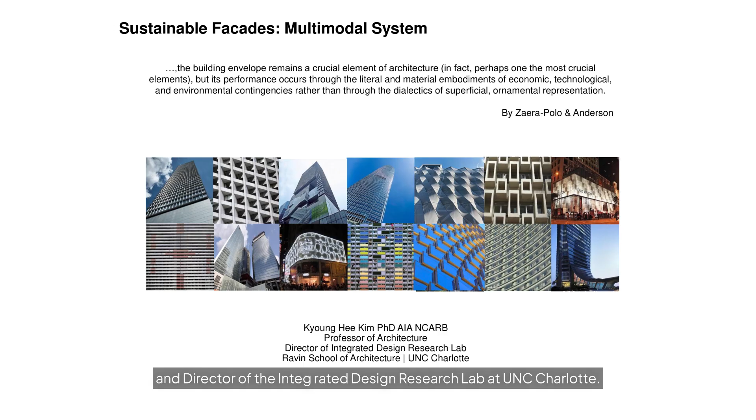Hello, I am Dr. Kyoung-Hee Kim, a professor of architecture and director of the Integrated Design Research Lab at UNC Charlotte. In this lecture, I will provide an overview of the importance and design principles of sustainable building enclosures.

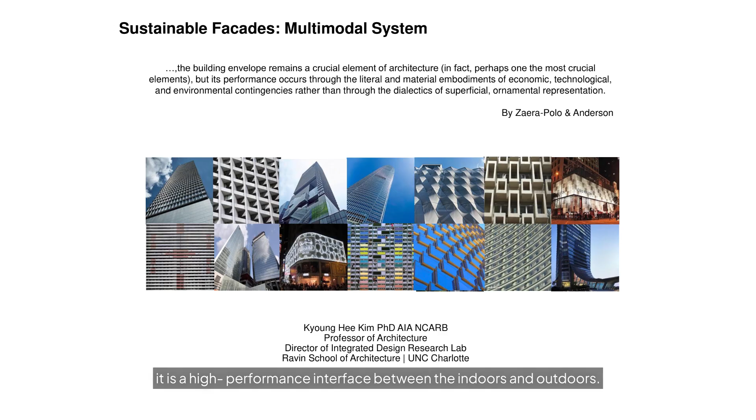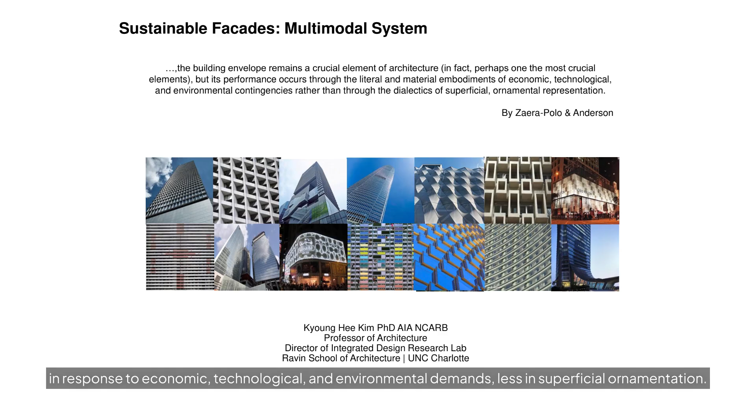Sustainable building facades serve multiple functions and operate across different scales and applications. The building facade is not just an aesthetical surface, it is a high-performance interface between the indoors and outdoors. As architects Zaera-Polo and Anderson argue, the building facade's significance lies in its material performance in response to economic, technological, and environmental demands, less in superficial ornamentation.

As I mentioned earlier, building enclosures operate at multiple scales from people to cities to the planet. They can function as economic, environmental, and social infrastructure, and they are more than a mere building surface or an aesthetic element. They interact with the environment to the advantage of people inside the building, the surrounding community, and the planet.

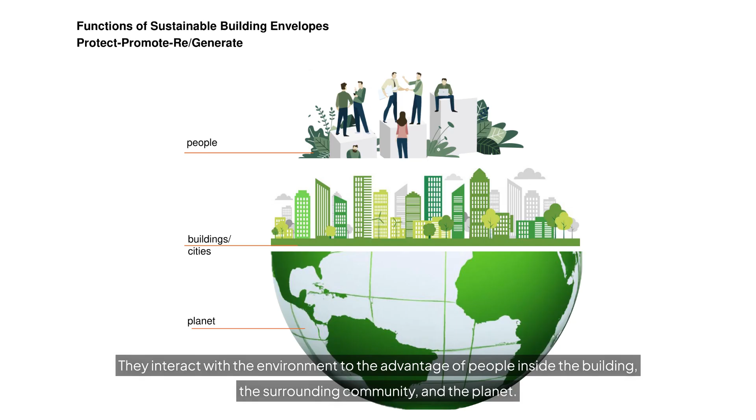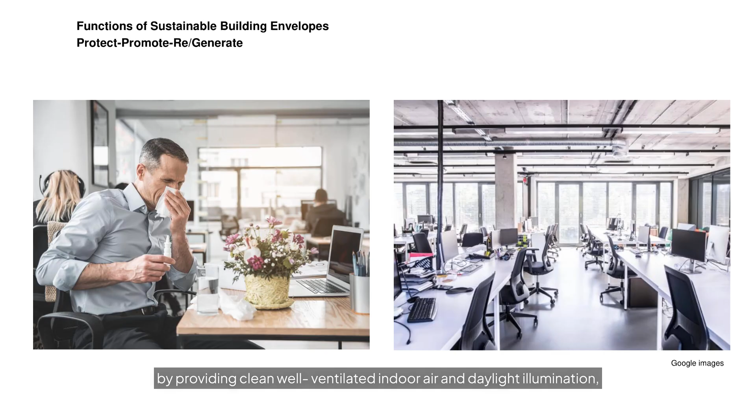On a personal level, the building enclosure is a filter against excessive outdoor environments. The sustainable building envelope promotes a healthier workspace by providing clean, well-ventilated indoor air and daylight illumination, contributing to overall well-being and productivity.

At the building and community levels, in addition to offering quality protection, the building enclosure enhances building energy efficiency and longevity. Moreover, it can capture clean energy and mitigate or collect stormwater runoff, making the urban environment more sustainable.

On a global scale, it reduces energy consumption, carbon emissions, resource consumption, and the cost of operating energy-driven buildings. It can integrate clean energy for on-site power production. It also has the potential to include living biofacades to foster biodiversity corridors in urbanized zones. In this planetary sense, the building envelope becomes a tool to align architecture with the Earth's ecological needs.

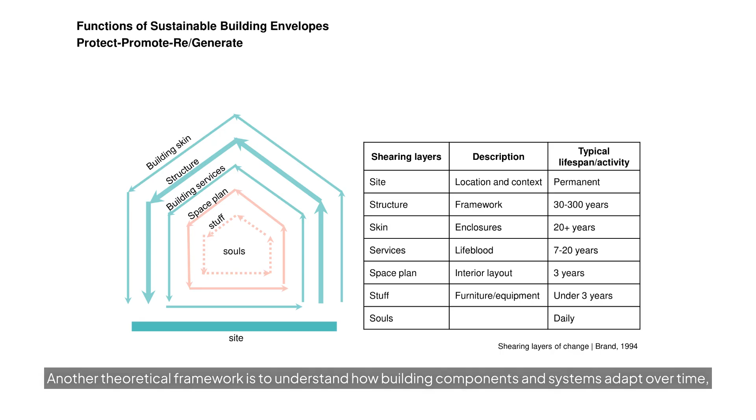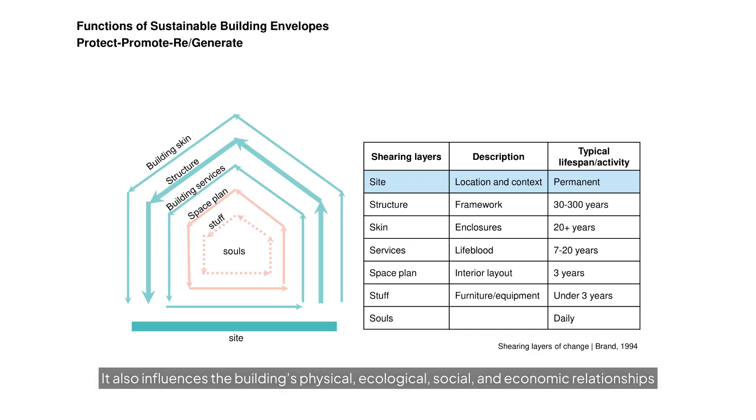Another theoretical framework is to understand how building components and systems adapt over time, as explained in Stewart Brand's concept of shearing layers of change. Brand describes that buildings are composed of architectural layers with different lifespans. The site layer is essentially eternal. It provides the geographic foundation and context for the building, which all other layers of a building are built upon. It also influences the building's physical, ecological, social, and economic relationships with its surrounding environment.

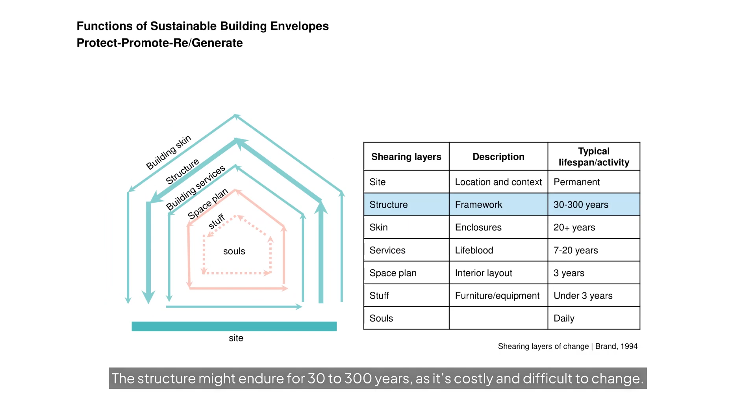The structure might endure for 30 to 300 years, as it's costly and difficult to change. It provides the essential building's bones, ensuring safety and stability over time.

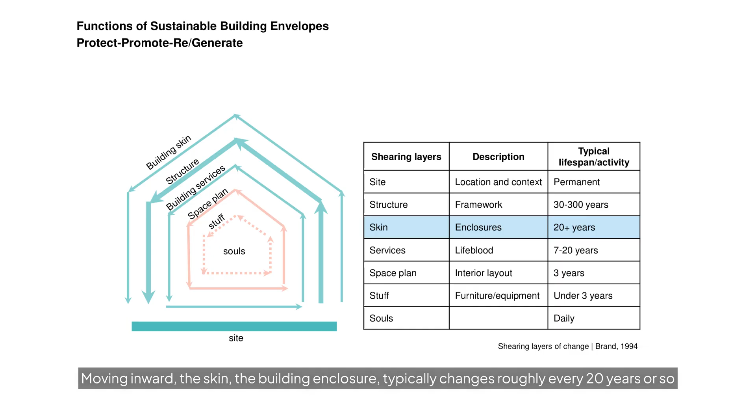Moving inward, the skin, the building enclosure, typically changes roughly every 20 years or so to keep up with technological advancement and aesthetic appeal.

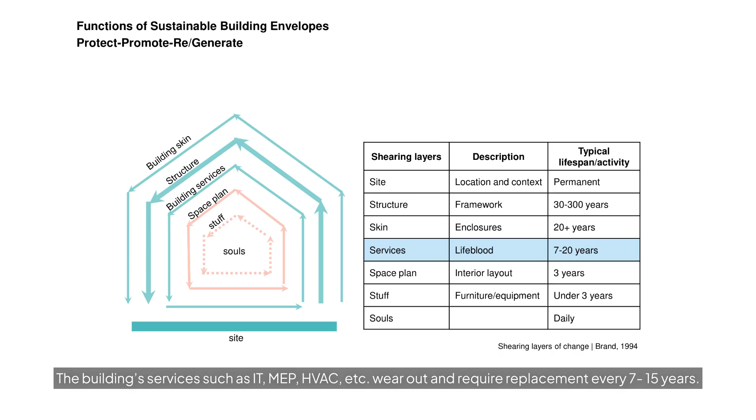The building services such as IT, MEP, HVAC, etc. wear out and require replacement every 7-20 years. They are crucial for operating buildings to ensure occupants' comfort, health, and well-being.

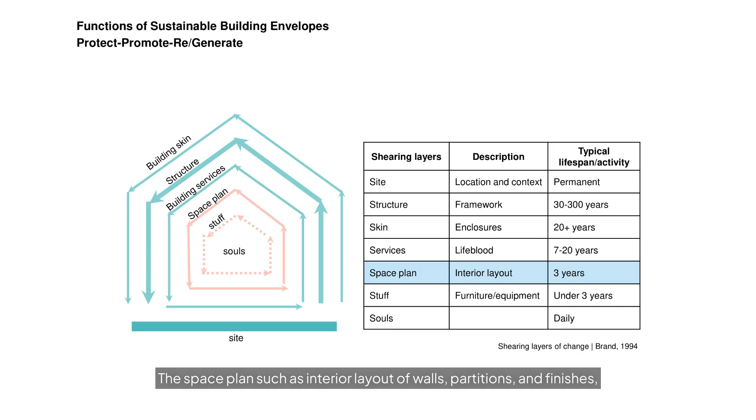The space plan, such as interior layout of walls, partitions, and finishes, might be altered on the order of every 3 years in a commercial setting. It allows for flexibility in spatial alterations, adapting to the evolving needs of occupants and activities.

At the most changing layer, the stuff inside, such as furniture and equipment, can change even more frequently, sometimes daily. The key idea is that each layer shears at its own pace. The building changes in pieces rather than all at once. This layered approach is part of systems thinking. Faster changing layers like services or enclosure systems should not be impeded by slower ones like structure. Sustainable design must account for continuous upgrade by allowing layers to be updated without disrupting others.

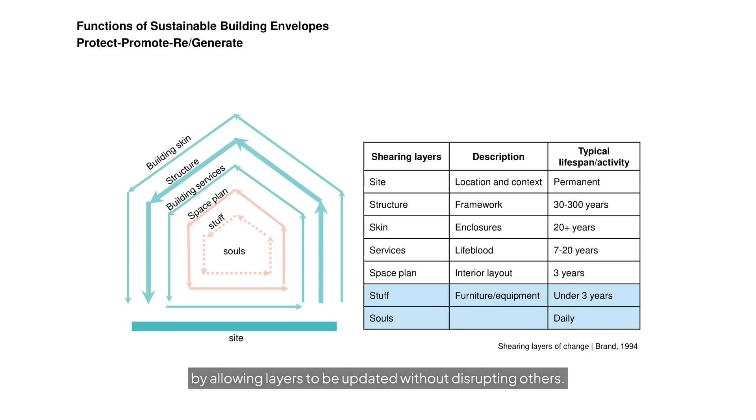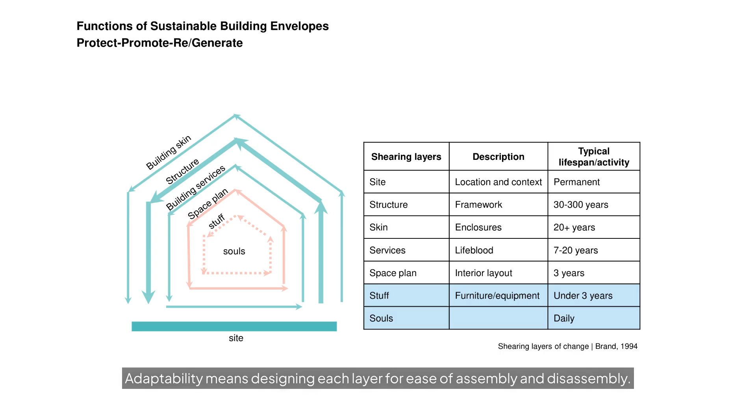Another design principle that Brand's theory promotes is adaptability within each layer. Adaptability means designing each layer for ease of assembly and disassembly. Using modular systems and mechanical connections, for example, is a good approach as they can be easily disassembled and assembled with future technologies required for upgrades.

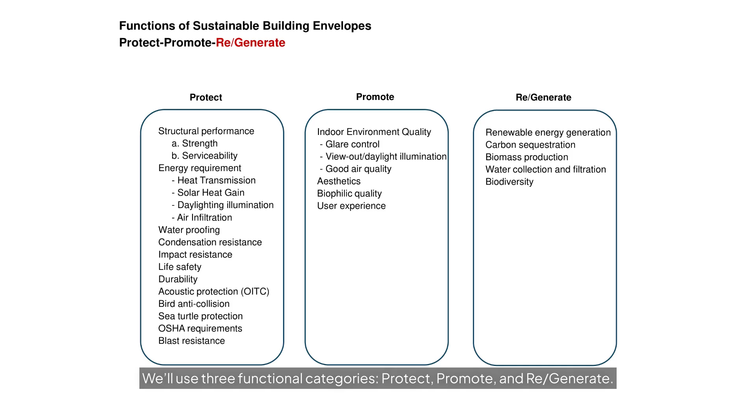Let's shift our focus to the multifunctionality of sustainable building envelopes. We'll use three functional categories: protect, promote, and regenerate.

Protect refers to the facade's fundamental role as a shield safeguarding the building and its occupants against weather and outside threats. It should maintain its strength and rigidity while enduring wind, seismic loads, and other external loadings that could threaten structural integrity and serviceability.

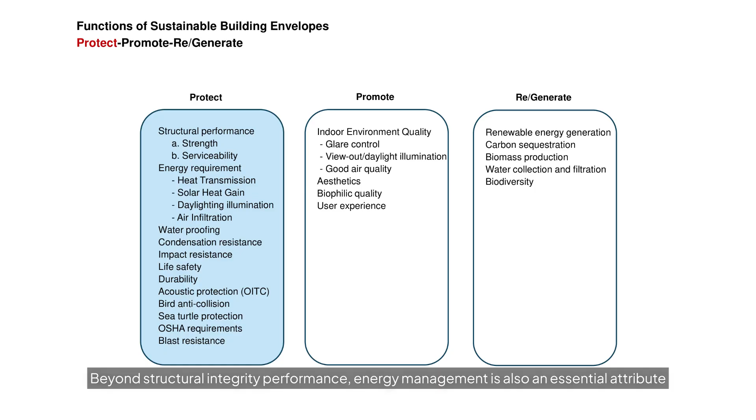Beyond structural integrity performance, energy management is also an essential attribute because the facade is the primary interface with the outdoor environment and controls solar gain, heat flow, and air infiltration across various seasons.

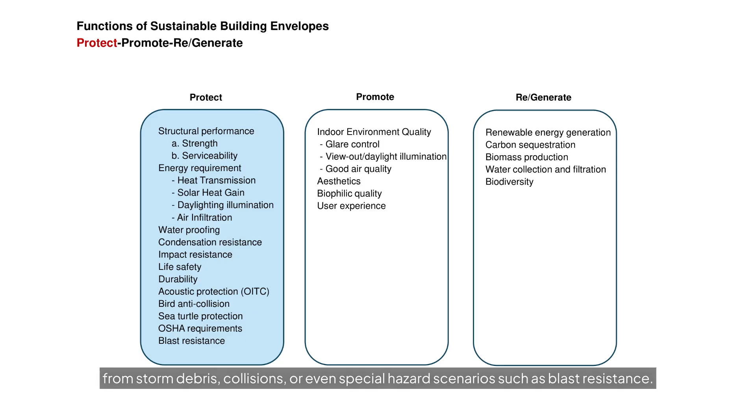Another critical protection is weatherproofing against rain and moisture, because water leaks and condensation cause molds that threaten occupant health and material longevity. In line with structural integrity, building enclosures should be able to withstand impact from storm debris, collisions, or even special hazard scenarios such as blast resistance.

Another level of protection is that building enclosures should provide life safety features such as fire resistance and the containment of smoke spread, protecting occupants during fire-related emergencies.

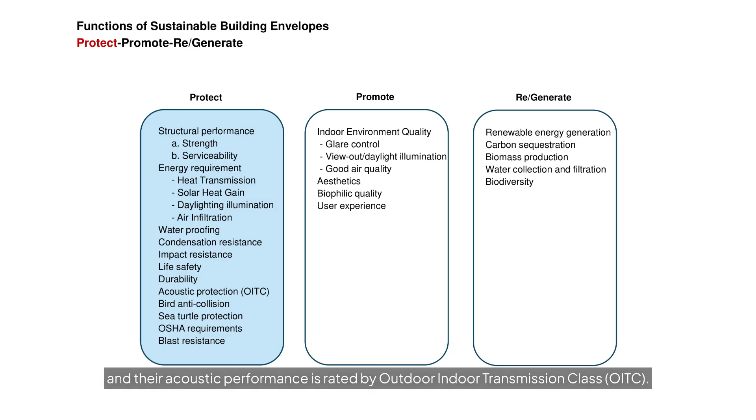Additionally, building facades can be designed to block unwanted noise from outside, and their acoustic performance is rated by Outdoor-Indoor Transmission Class, OITC. Building enclosures can be part of protecting nature. They can be designed to prevent bird collisions and to avoid disorienting sea turtles for nature protection.

Certain buildings with a history of bombings, embassies, and government buildings may require enclosures designed to resist explosions or provide blast protection. All these measures ensure the safety of users and nature, as well as the longevity of the building.

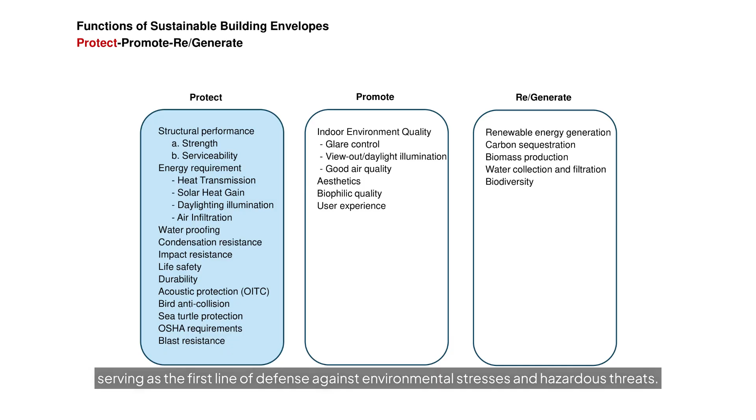In short, the building facade is an essential architectural element, serving as the first line of defense against environmental stresses and hazardous threats.

Let's move to the next functional category of promote. Promote covers how the building enclosure further enhances the indoor environment and occupant health and well-being. Sustainable facades promote good indoor environmental quality, IEQ, in terms of thermal comfort, daylighting quality, air quality, and user experience.

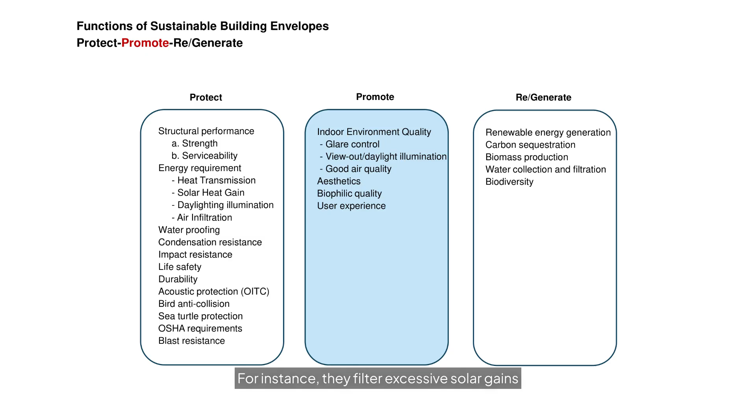For instance, they filter excessive solar gains and mitigate cold bridging to provide a thermally comfortable space. They also allow ample daylight inside while controlling glare through features like well-designed windows, light shelves, or shading devices.

They also provide occupants with a view out to connect them with the outdoors, which has known benefits for wellness. The facade can contribute to fresh air and natural cooling by enabling natural ventilation through operable windows or ventilation panels.

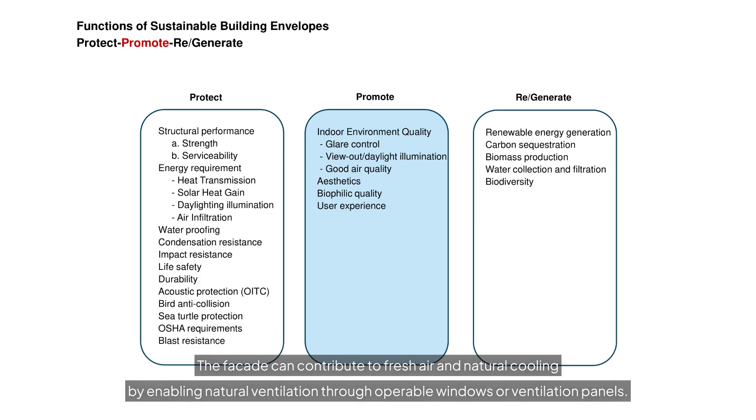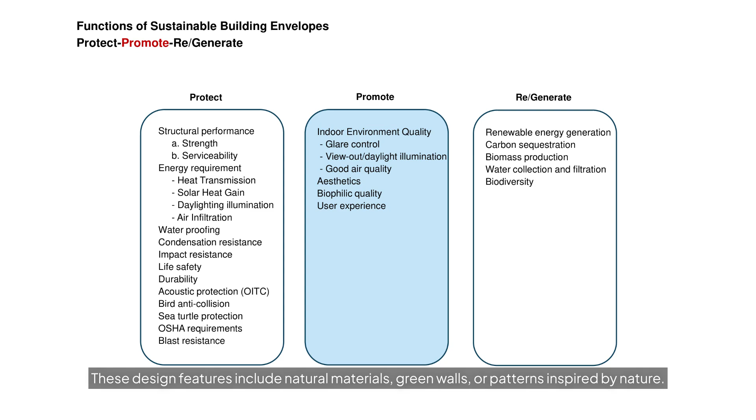Next, the aesthetics and even biophilic qualities of the facade also play a role in work productivity and less sick leave. These design features include natural materials, green walls, or patterns inspired by nature. They can reduce stress and improve the emotional experience of space.

In essence, under promote, the facade isn't just minimizing negatives, it's actively creating a healthy, pleasant environment for people inside. All of this improves occupant health and well-being.

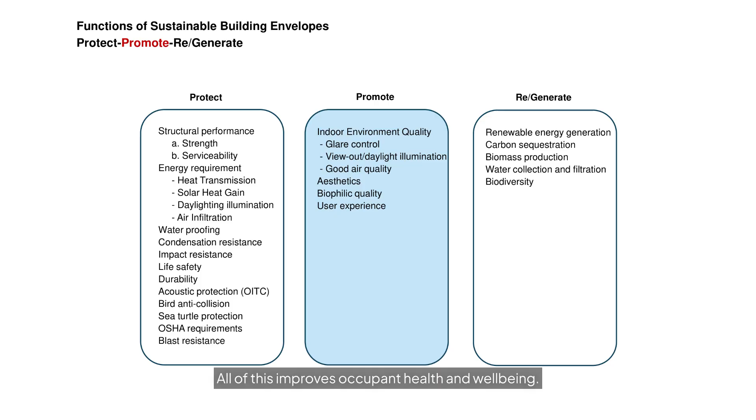Regenerate is the third functional category that highlights the facade's capacity to actively improve or regenerate resources and aspects of the ecosystem. Traditional high-performance enclosures aim for neutrality, aiming to do no harm, but regenerative design often aims for resource generation and a positive impact.

As the building's direct interface with the outdoors, facades can generate renewable energy, for example, by integrating photovoltaic panels. A solar facade can harvest energy from sunlight, turning the building's skin into a small power plant and reducing the building's reliance on fossil fuels.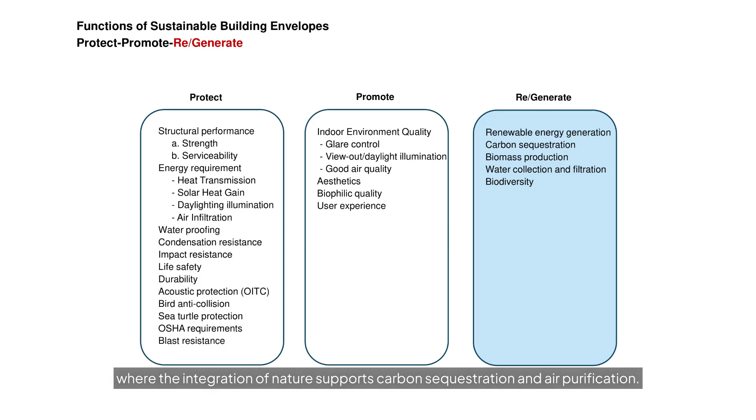While energy production is one form of regeneration, building facades can serve as vertical landscapes where the integration of nature supports carbon sequestration and air purification. Supporting biodiversity is another regenerative quality, along with water regeneration through rainwater collection and filtration systems embedded in the facade.

Facades can capture rainwater for domestic use and irrigation. All these approaches assist the building not only to lessen its footprint, but also to enhance the entire ecosystem.

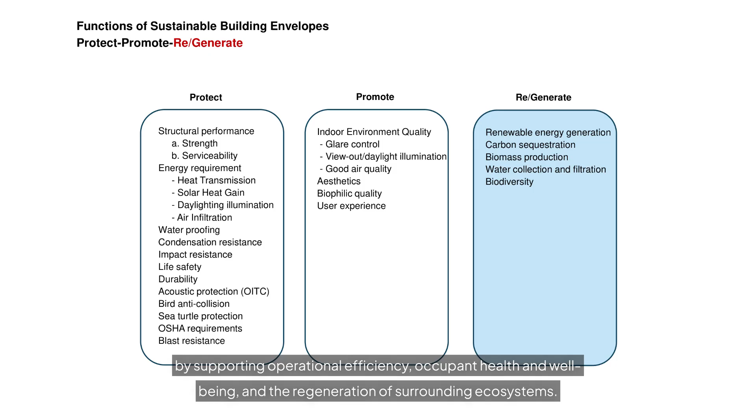In conclusion, sustainable facades play a vital role in building performance by supporting operational efficiency, occupant health and well-being, and the regeneration of surrounding ecosystems. In essence, the facade is central to realizing a regenerative and resilient built environment.